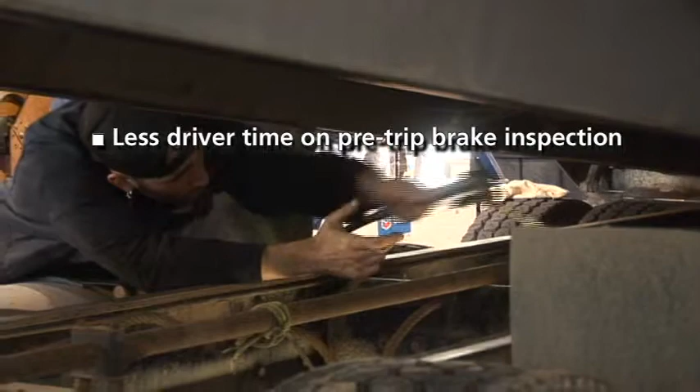Productivity will increase because your drivers will be spending less time on pre-trip brake inspection. There will be less downtime from roadside detention due to out-of-service infractions. Your mechanics will spend less time locating and diagnosing brake faults. Equipment is on the road quicker with less downtime in the shop.

In this presentation, we will show you that Brake Inspector is a valuable tool that will pay for itself in lower maintenance and operating expenses. Depending on your fleet's operating costs and maintenance procedures, Brake Inspector can pay for itself in less than 12 months, and it can enhance the reputation of your fleet and your commitment to safety in the eyes of regulatory agencies and the public at large.

Brake Inspector can improve your safety record by helping to eliminate brake-related roadside infractions and resulting fines. This means no brake-related demerit points. Brake Inspector will increase driver confidence in the safety of the vehicle. You will demonstrate to regulatory and inspection agencies that you are committed to safety, and you gain the public relations benefit of operating a safe fleet.

Let's take a closer look at the Brake Inspector Air Brake Diagnostic System. The in-cab module displays up to 4 axles with LEDs at each wheel end, representing a specific brake chamber. The chambers are identified by axle and by left side and right side orientation. The tricolor LEDs emit green, yellow, or red signals indicating the type of brake defect and the wheel end location.

A row of 4 LEDs at the top of the display module permits review of the brake stroke status after each brake application. 2 cables exit the back of the display, allowing the gauge to interface with the sensors located at each wheel end position. The entire display module is encased in an impact-resistant housing that is sealed with a weatherproof epoxy compound.

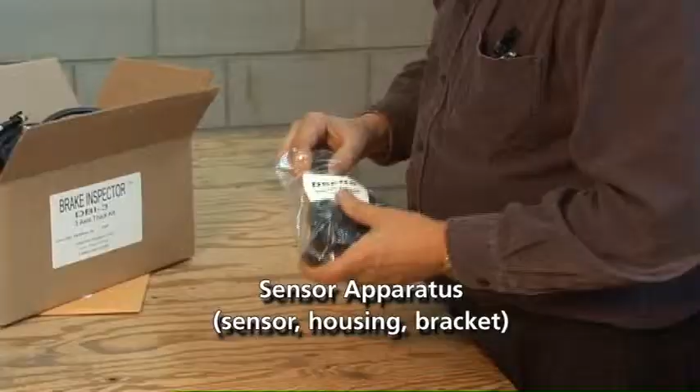The sensor contains an automotive-grade microprocessor and Hall effect switches activated by pushrod movement when air brakes are applied. Electronic components are encased in a durable, impact-resistant Styron enclosure that is sealed with epoxy for complete weatherproofing. The sensor is not affected by temperature or altitude, performing in the most severe environments.

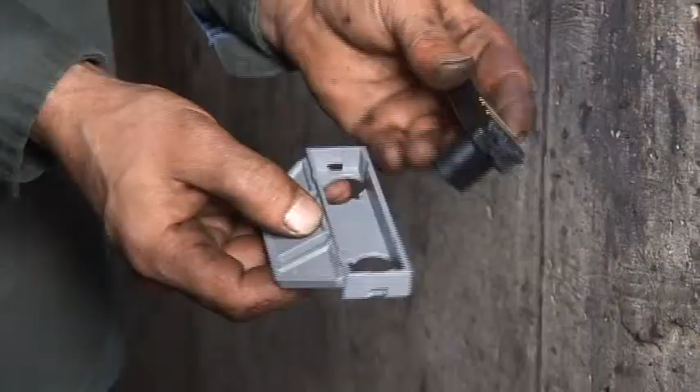A high-impact Styron housing is used to secure the sensor, which snaps into the housing. A zinc-plated heavy-duty steel bracket is provided to mount the sensor housing to the brake chamber. The main bracket attaches the sensor assembly to the brake chamber.

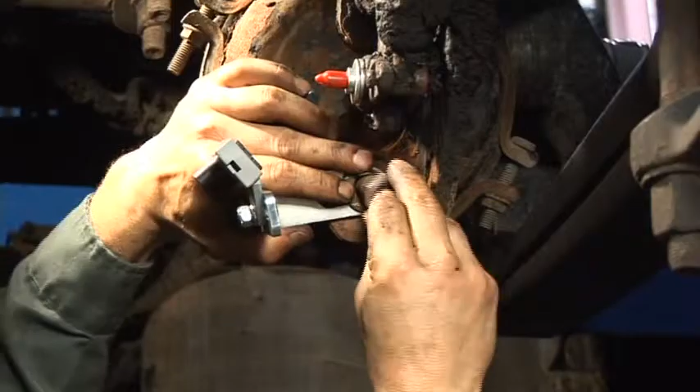The companion to the sensor is a magnetic clevis pin that replaces the existing clevis pin. A powerful neodymium magnet at the end of the clevis pin is positioned up to 1/4 inch from the sensor face and activates the sensor as brakes are applied and released. A durable red plastic cover provides easy visibility of the magnetic clevis pin and helps with sensor alignment.

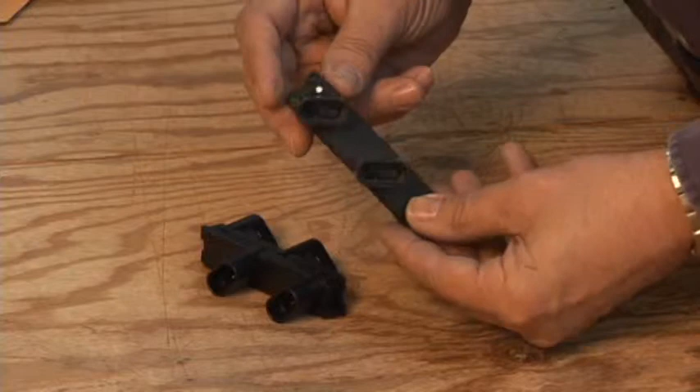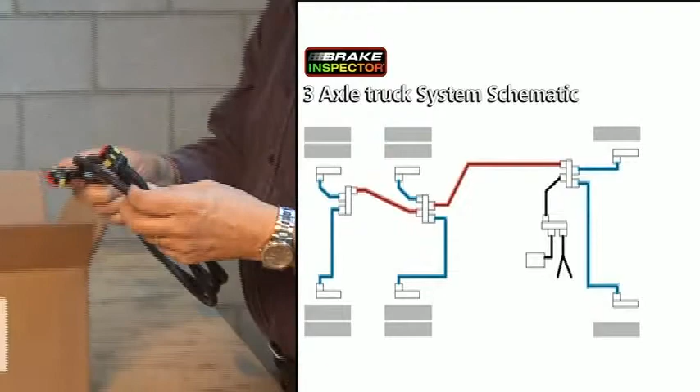The Brake Inspector kit includes a junction unit called a crossover that provides 3 or 4 connection points. Crossovers are made from durable, impact-resistant Styron and contain a circuit board that is sealed with epoxy for complete weatherproofing. A cable extension with male connectors on each end is used to link sensors, crossovers, and the display module, forming a daisy-chained harness.

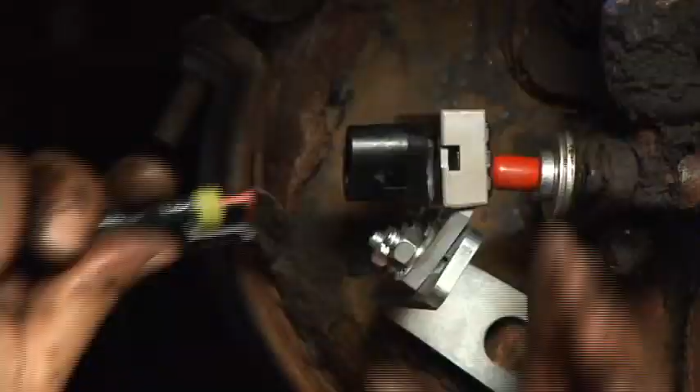The cable extensions have super seal connectors that are waterproof when mated with the crossover or sensor. They also have a heat-resistant nylon loom for additional protection. Extensions of various lengths are used to connect the system.

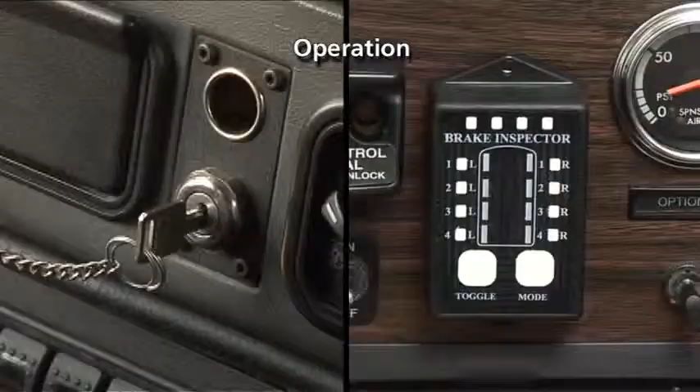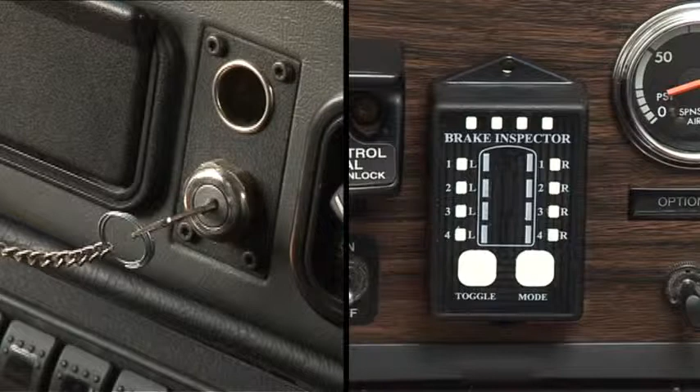Let's look at how the Brake Inspector system operates. When the ignition is turned on, the wheel end LEDs will illuminate simultaneously in red, yellow, and green, followed by the stroke LEDs at the top of the display. The system is showing that all LEDs are in working order and the Brake Inspector system is activated.

When the foot pedal is depressed, these LEDs will indicate the brake fault status at each wheel end position. During the ignition startup sequence, the Brake Inspector system automatically enters into driver mode.

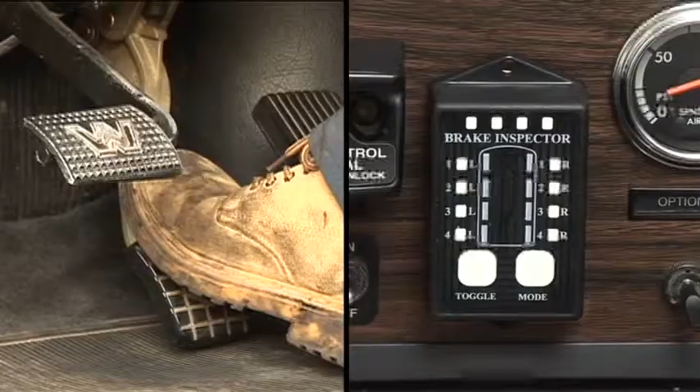When the brakes are applied, only fault conditions are shown on the display gauge. In the event there are no faults, the LEDs will not illuminate. A second mode, called Maintenance Mode, can be activated to show LED illuminations for both brake fault and no fault conditions. The Mode button on the display module is pressed once to move from Driver Mode to Maintenance Mode. You can now see all conditions.

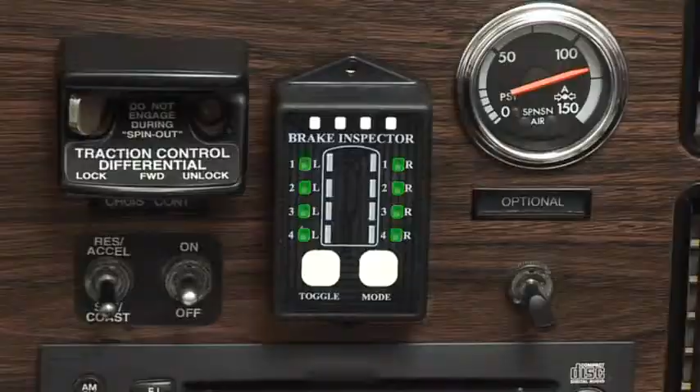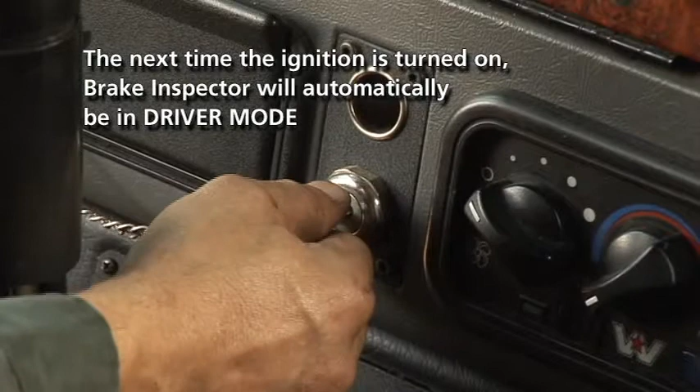A no fault condition is shown with a green LED at the wheel end. The system will remain in Maintenance Mode until the Mode button is pressed again to re-enter Driver Mode or the ignition is turned off. When the ignition is again turned on, the brake inspector will automatically be in Driver Mode.

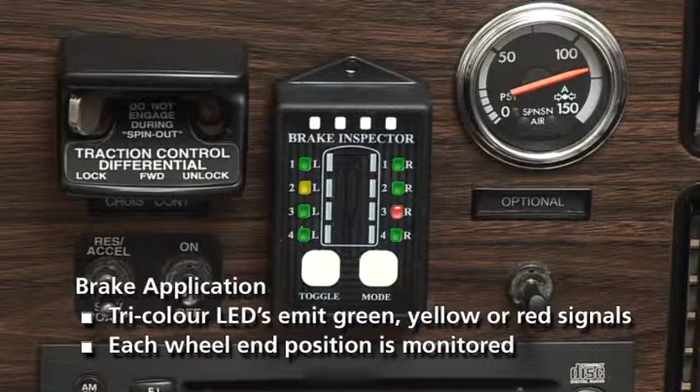Brake Inspector will show brake performance with LEDs representing each brake chamber at a specific wheel end position. The tricolor LEDs emit green, yellow, or red signals indicating the type of brake fault and the wheel end location. When the air brakes are applied, the push rod moves the magnetic clevis pin across the face of the sensor, and the display module LEDs are illuminated.

A status LED at each wheel end will light solid green, indicating that brakes are in proper adjustment. As the brake adjustment point is approached, a solid yellow LED will light up. When the limit is reached or exceeded, a solid red LED will alert the driver that brakes need to be adjusted. If the brake fails to activate, a flashing red LED will indicate this problem.

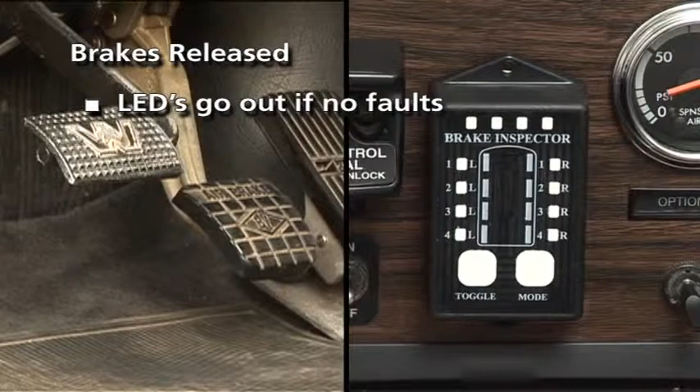When the user releases the air brakes, the LEDs will automatically extinguish if no faults are indicated. If a solid green, yellow, or red LED remains on after the brakes are released, the push rod at the wheel end where the LED is still illuminated has not retracted. This indicates a dangerous hung brake condition. The display module LEDs will show brake fault conditions for 15 seconds and then extinguish to avoid distracting the driver of the vehicle.

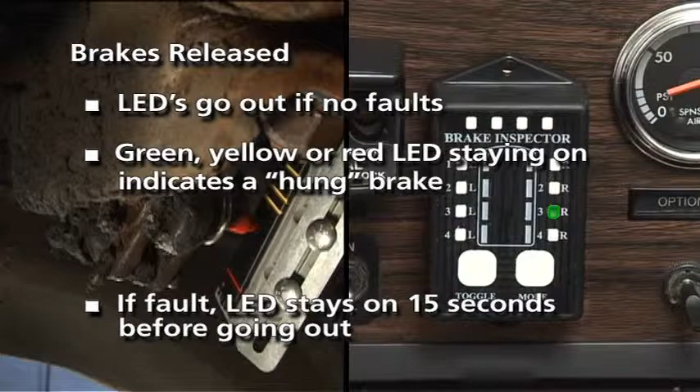When the parking brake is applied, Brake Inspector will indicate if the parking brake spring is operating properly or if there is a weak or broken spring. Because there are no parking brakes on the steer axle wheel end, LEDs will begin flashing red. This occurs because the system detects no push rod movement. The remaining rear axle wheel ends will illuminate green if the springs are in good condition. If a chamber has a weak or broken parking brake spring, the wheel end with a defect will flash red.

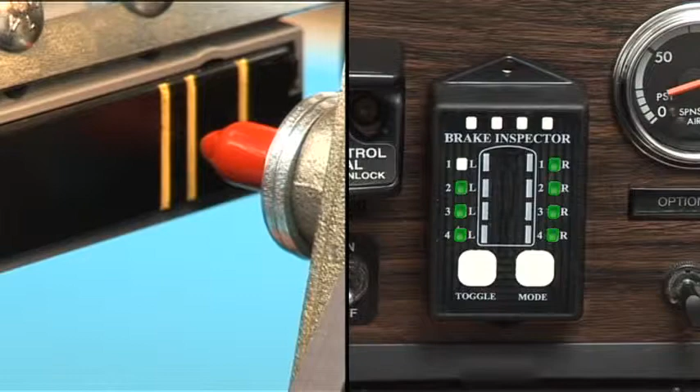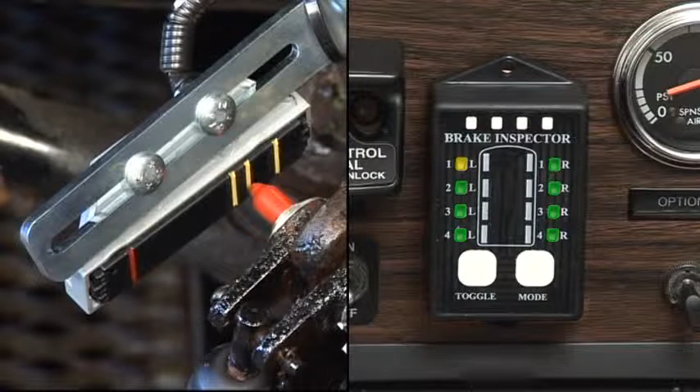Brake Inspector has the ability to indicate if a system malfunction occurs. When the brakes are applied, a flashing green LED indicates the sensor and clevis pins are not aligned. Realignment must be completed for proper performance monitoring. Similarly, if a sensor ceases to operate, a flashing yellow LED will occur at the affected wheel end. A new sensor is required for proper performance monitoring.

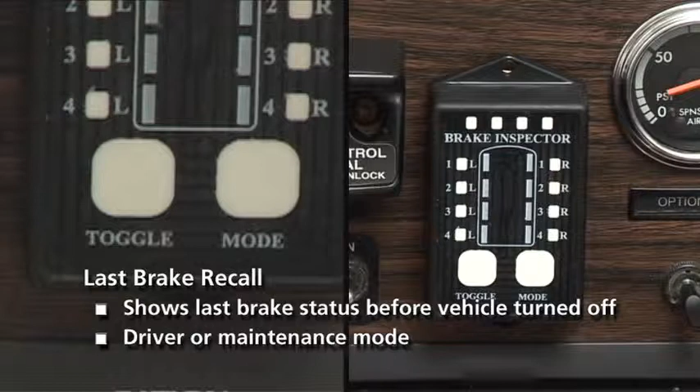Brake Inspector stores the last brake application before the ignition is turned off. The last brake application will be displayed when the Brake Inspector system is in Driver Mode or Maintenance Mode. While the system is operating, push the toggle button once to review the last brake application. Note that all wheel end LEDs will light up indicating the stroke status and fault status.

Press the toggle button again and the front left wheel end LED labeled 1L will illuminate. The brake stroke adjustment LEDs at the top of the display module will show the brake stroke adjustment status of yellow for the front left wheel end. By pressing the toggle button again, you will see the last brake application results at the next wheel end position.

Let's turn our attention to how the system is installed. Brake Inspector installs easily with normal shop equipment. This diagram shows a typical 3-axle installation. At each wheel end, a Brake Inspector magnetic clevis pin replaces the existing clevis pin. A sensor is mounted on each brake chamber and positioned to align with the clevis pin.

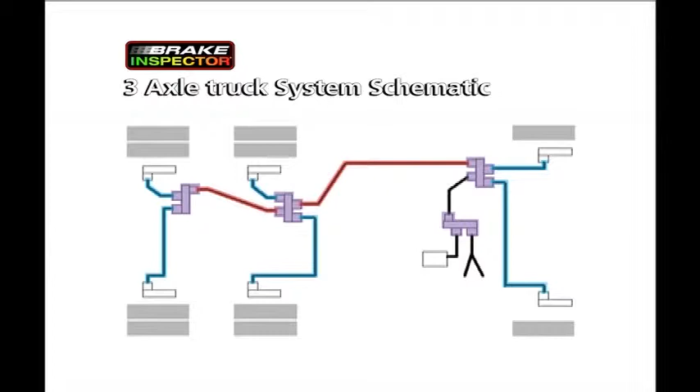The sensor assembly at each wheel end is connected using a cable extension to a junction called a crossover. These are positioned over each axle. Each crossover is connected in a daisy chain from the rear axle to the front axle until all axles are linked together. The display module is attached to the dash of the vehicle using a Velcro pad or self-tapping screws.

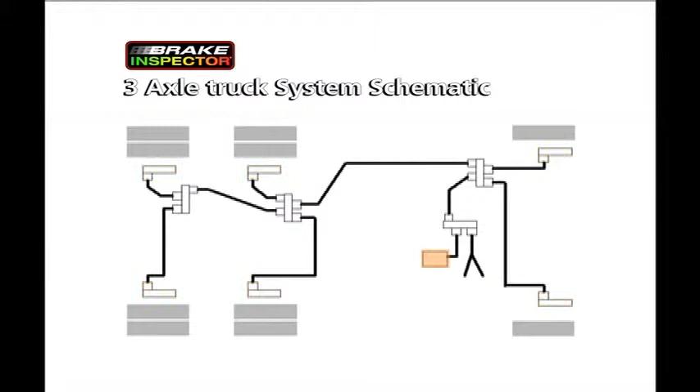The display module cable is fed through the dash and connects through the firewall to the steer axle crossover. Finally, the display module and sensors are programmed to identify wheel end location on the display module and brake adjustment limits based on brake chamber type.

As we stated earlier, Brake Inspector will have a positive impact on maintenance costs. Let's consider unnecessary brake adjustments. Many drivers today do not or cannot identify out-of-adjustment brakes. During a pre-trip inspection, they will not complete the time-consuming procedure of chalking and measuring pushrod travel. It is easier to tell maintenance that the brakes need adjustment.

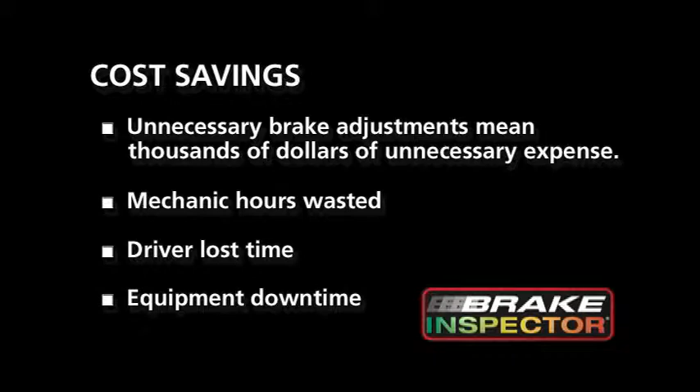This means both driver and equipment downtime as a mechanic inspects the brakes. The result is hundreds of hours annually of unnecessary mechanic labor combined with the same lost hours of driver and equipment productivity. What is the cost to your fleet? Let's take a look at a typical well-run fleet using our savings calculator.

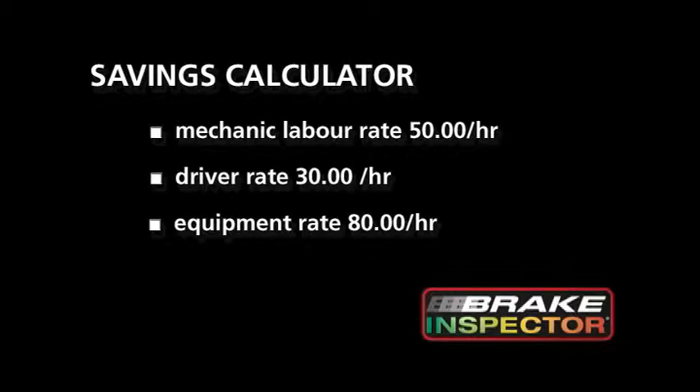Let's assume we have internal operating costs of $50 per hour for a mechanic, $30 per hour for drivers, and an equipment billing value of $80 per hour. In fact, your fleet's history may show costs that are similar or higher. If your mechanic performs 3 unnecessary brake adjustments per week on your trucks or trailers, you are looking at hours of unnecessary labor. Using the costs of our example, this means an annual expense of $1,152 for unnecessary maintenance.

Brake Inspector alerts your driver and maintenance staff to brake adjustments when they are needed. This means your fleet spends more time on the road and less time in the shop. Brake Inspector will preempt costly repairs by identifying existing and potential brake problems. Brake Inspector will alert you to maintenance issues that your highly trained staff will not normally uncover during routine maintenance inspections. The system will detect non-activating or frozen slack adjusters. A dangerous hung brake condition is immediately detected.

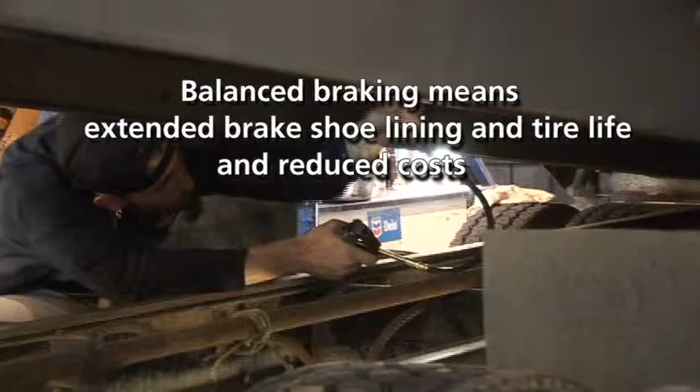Slow activating or deactivating brake chambers are identified and point the way to kinked lines, blocked or seized valves, and related causes. The result is preemptive maintenance opportunities before costly repair or replacement is required, costing many hundreds, even thousands of dollars.

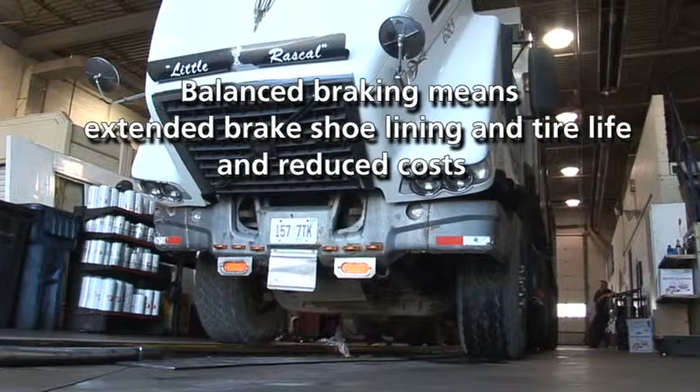Quite often, a vehicle's brakes are at different levels of wear. A unique feature of Brake Inspector lets your maintenance staff adjust all brake chambers to the same adjustment point. This ensures that equal braking force is being applied at each wheel. No single wheel end is bearing a greater braking load than other wheel ends. This balanced braking means more even tire wear, extended tire life, and lower replacement costs.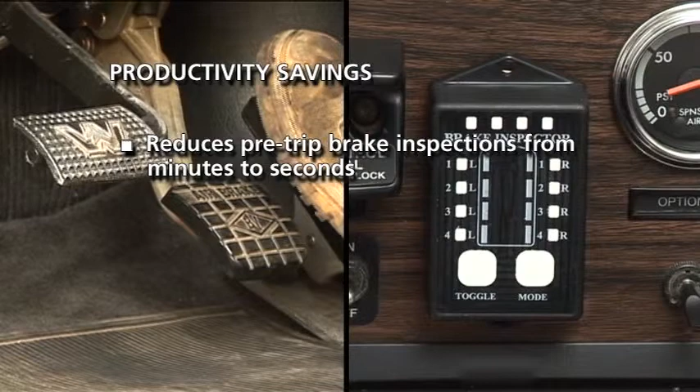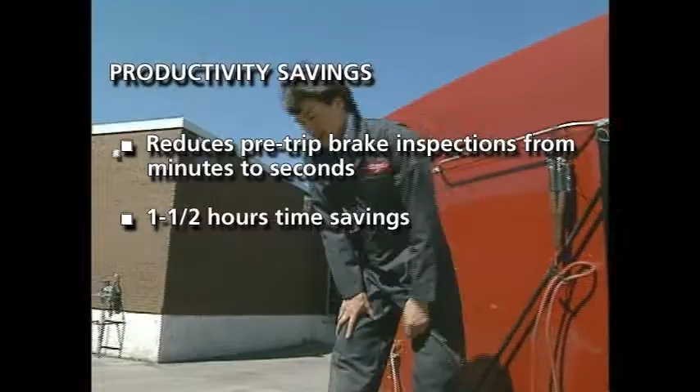From a productivity standpoint, Brake Inspector will reduce the time for your driver to complete his daily pre-trip inspection. For example, a full check of air brake operating status takes about 20 minutes for a 3-axle vehicle. This amounts to over an hour and a half every week. With Brake Inspector, the air brake inspection takes only the time required to apply a full brake application and check the display module. 1.5 hours weekly is now a matter of seconds. The equipment is no longer tied up for lengthy pre-trip brake inspections. Even fleets that can perform the inspection in less time will enjoy the productivity improvements from using Brake Inspector.

Using the savings calculator, we can see that quicker pre-trip inspections can result in thousands of dollars saved each year. Driver downtime can be reduced over $2,000 each year, and your equipment will be on the road faster with up to $6,000 of increased productivity. Considering the savings from unnecessary brake adjustments and less time doing pre-trip brake inspections, the Brake Inspector system will pay for itself in less than 12 months. And that's before any added costs from roadside detainment and out-of-adjustment fines.

Brake Inspector means a safer fleet with added cost savings. Equipping your fleet with Brake Inspector means fewer roadside detentions for out-of-service violations. The cost of dispatching a mobile mechanic or your maintenance staff can be extremely expensive, and that's before you address equipment downtime and late deliveries. Fewer expensive roadside fines for brake infractions means less expense to your operation. Fewer operating demerits mean less penalties for your fleet. And the value of improving your reputation for commitment to road safety to the regulatory agencies, to your employees, and the public in general? Priceless.

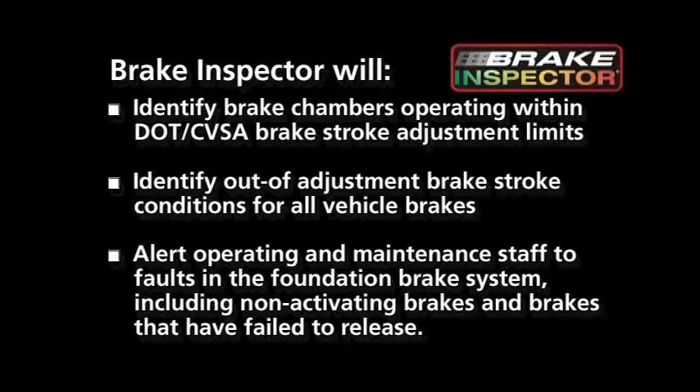To recap, Brake Inspector is an air brake diagnostic system that identifies brake chambers operating within DOT brake stroke adjustment limits, identifies out-of-adjustment brake stroke conditions for all vehicle brakes, and alerts operating and maintenance staff to faults in the foundation brake system, including non-activating brakes and brakes that have failed to release. Brake Inspector will provide your fleet with real maintenance and productivity savings by reducing maintenance costs from unnecessary brake adjustments, by revealing brake problems and faults before they become expensive repairs, and by extending tire wear through balanced braking.

Brake Inspector shortens the driver pre-trip brake inspection time. It also reduces mechanic time spent diagnosing out-of-adjustment brakes. Your equipment is more productive, spending less time in the shop and more time on the road. Brake Inspector means a safer fleet with fewer roadside detentions for out-of-service violations, fewer expensive DOT fines, and lessens your operating demerits. Improved confidence for staff, customers, and the driving public.